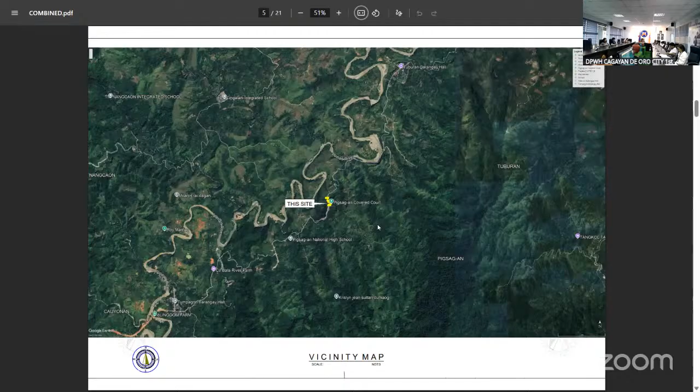There's also installation of solar street lights. For the general drawing, it is located in Barangay Pigsag-an. This is the vicinity map and the site development plan, fronting the Pigsag-an Barangay Hall, along with its coordinates.

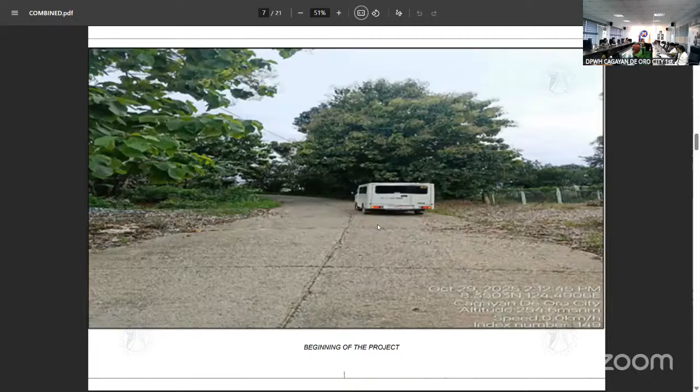This is the disposal site plan and the geotagged site images of the project - this is the beginning and this is the end of the project. For the plan and profile, you can see the scope of works, the positioning of the solar street lights, and the whole 200-meter length of the project.

This is the straight line diagram. For the typical drawing, we have 2.5 meters on both sides, so 5 meters overall width of the project, and here are the details of the typical reblocking along the whole stretch of the project.

There will be accompanying reflectorized thermoplastic pavement markings. Here are the details, the PCCP details, and the geometric design standard drawings.

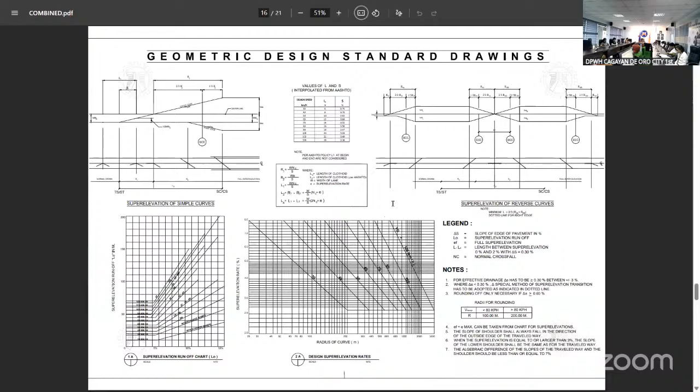For the summary of quantities: B.31 permits and clearances, 1 lump sum; B.5 project billboard and signboard, each; B.72 occupational safety and health program, 1 lump sum; B.81 traffic management, 1 month; B.9 mobilization demobilization, 1 lump sum.

1013B3 removal of actual structure obstruction, 0.23 meters thick PCCP unreinforced, 1,000 square meters; 1022 surplus common excavation, 496 cubic meters; 1031A structure excavation common soil, 4.75 cubic meters; 1047 gravel fill, 0.43 cubic meters; 2011 aggregate base course, 200 cubic meters.

3111E1 Portland cement concrete pavement unreinforced, 0.28 meters thick, 14 days, 1,000 square meters; 4041A reinforcing steel grade 40, 196.68 kilograms; 4051A2 structural concrete, 2.2 cubic meters; 4056 structural concrete painting works, 2.4 square meters.

6121 reflectorized thermoplastic pavement markings, white, 47.2 square meters; 6122 reflectorized thermoplastic pavement markings, yellow, 16.57 square meters; 6299 C1 single arm solar LED roadway lighting, 9-meter pole, 80 to 125 watts, 3 each.

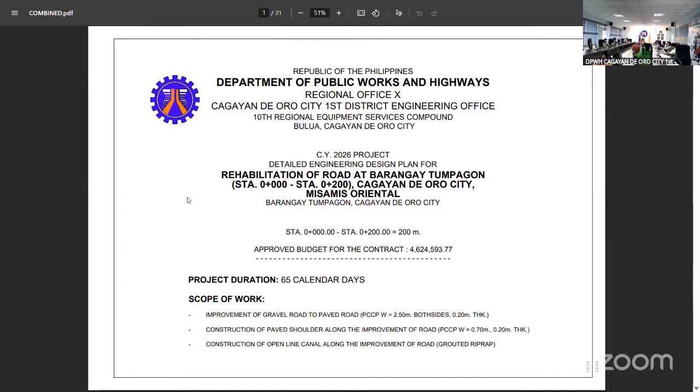So general drawing, this is located in Barangay Tumpagon. So this is the vicinity map, and this is the site development plan. For specific location, this is before the Centron sa Tumpagon, as you can see here, it is before the Tumpagon National High School. So it is left side if you're going to the Tumpagon National High School.

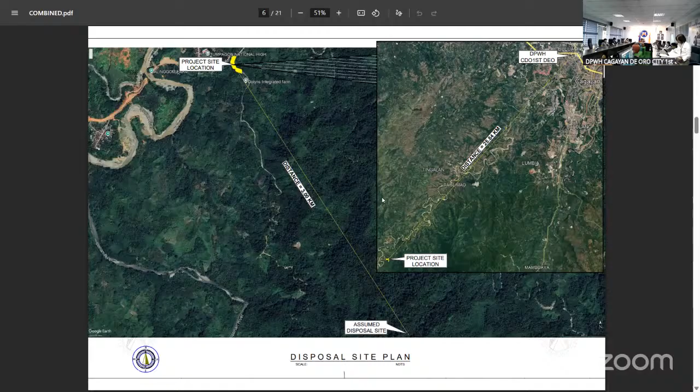So this is again the site development plan, and this is the disposal site plan. And the site images, so this is located again before the Tumpagon National High School, so going, it is located on the left side.

So for the plan profile, this is the plan and profile, indicating the scope of work along with the installation of solar street lights. So this is the straight line diagram.

So for typical drawing, this is our typical drawing. We have here the 2.5 meter both sides width of carriageway, and the shoulder of 0.7 meters both sides also paved, and the construction of line canal, material used is grouted riprap. So the whole stretch of this project is also accompanied with reflectorized thermoplastic pavement markings. So this is the detail.

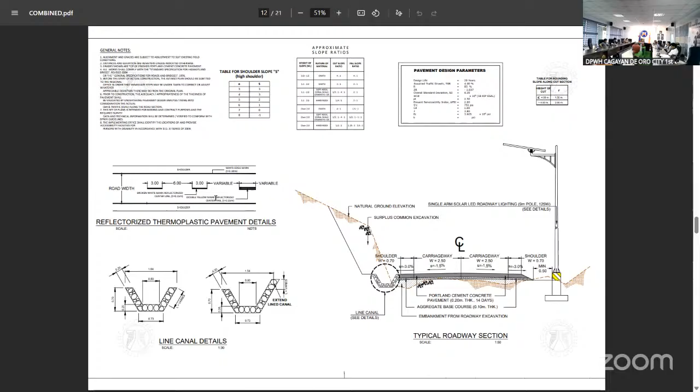So this is the PCCP details, the geometric design standard drawings.

So for our summary of quantities, we have here B.31 permits and clearances 1 lump sum, B.5 project billboard and signboard for each, B.72 occupational safety and health program 1 lump sum, B.81 traffic management 1.43 months, B.9 mobilization demobilization 1 lump sum.

1022 surplus common excavation 1,668.46 cubic meters, 1031A structure excavation common soil 7.92 cubic meters, 1041A embankment from roadway excavation 160.03 cubic meters, 1047 gravel fill 0.72 cubic meters, 2011 aggregate base course 141.16 cubic meters.

3111B1 Portland cement concrete pavement unreinforced 0.2 meters thick, 14 days, 1,280 square meters. 4041A reinforcing steel grade 40, 327.8 kilograms. 4051A2 structural concrete 3.66 cubic meters. 4056 structural concrete painting works 4 square meters. 5052A grouted riprap class A, 80 cubic meters.

6121 reflectorized thermoplastic pavement markings white, 49 square meters. 6122 reflectorized thermoplastic pavement markings yellow, 26.76 square meters. 6299 C1 single arm solar LED roadway lightings, 9 meter pole, 80 to 125 watts, 5 each.

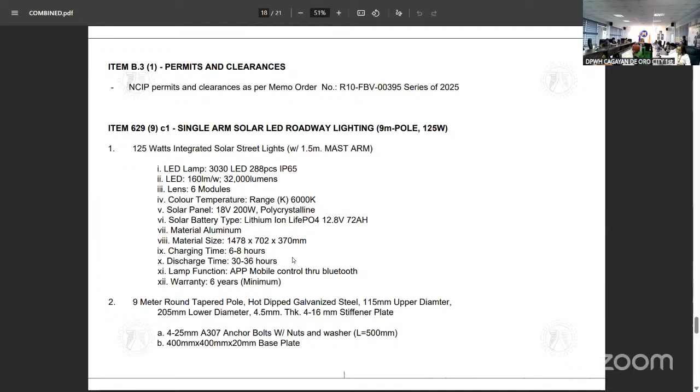In continuation, these are the attachments: the road right of way attachments and the soil test reports. So that's all for this project. Thank you, any questions?

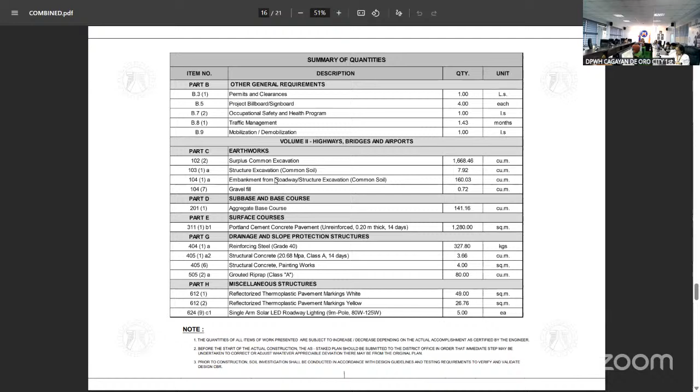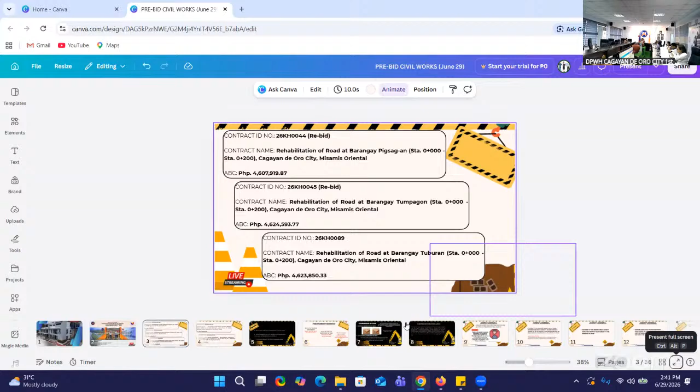Let's now proceed to the third project: rehabilitation of road at Barangay Tuburan of the city, with an approved budget for the contract of 4,623,850 pesos and 33 centavos, that will be discussed by the engineer.

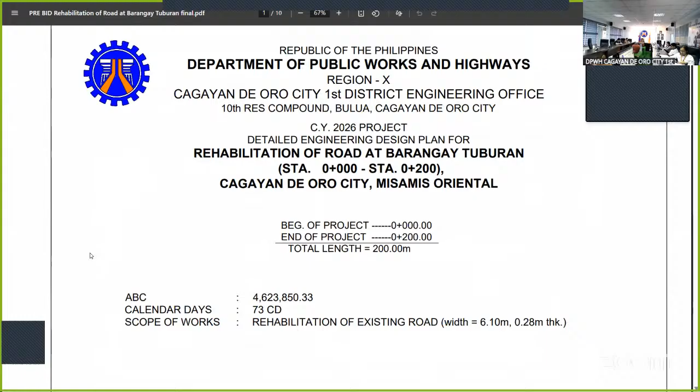Good afternoon, everyone. For rehabilitation of road at Barangay Tuburan, with station 0+00 to station 0+200, Cagayan de Oro City. With this project we have a total net length of 200 meters, with an ABC of 4,623,850.33 and 73 calendar days. This is rehabilitation of existing road to a width of 6.10 meters and a thickness of 0.28 meters thick.

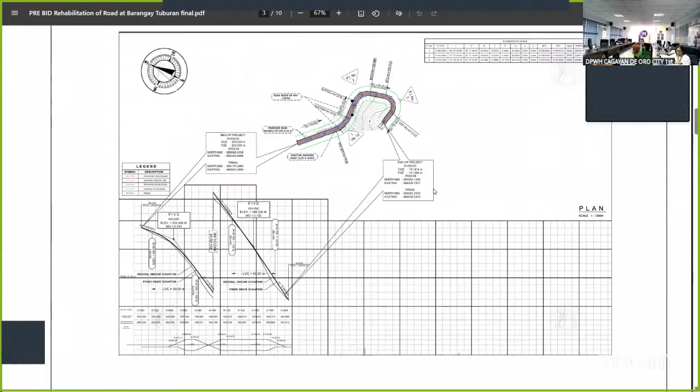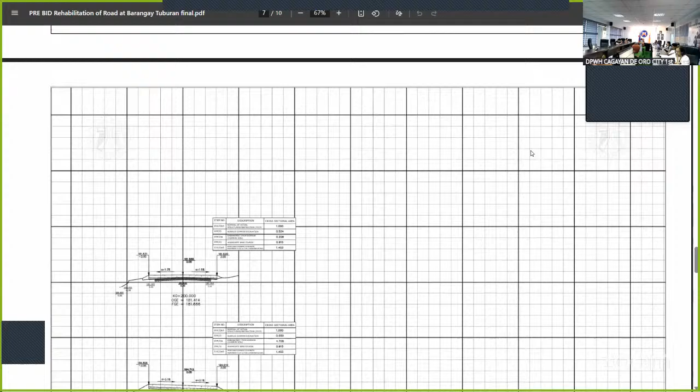Next is the summary of quantities for the project. For B.3, permits and clearances, we have 1 lump sum. B.5, project billboard/signboard, per each. B.7 (2), occupational safety and health program, 1 lump sum. B.8 (1), traffic management, 1 lump sum.

Next is B.9, mobilization/demobilization, 1 lump sum. For earthworks, we have 101-3B3 for removal of actual structures/obstruction, 0.3 meters thick PCCP unreinforced, with a quantity of 1,000 square meters. For 102.2, surplus common excavation, we have a quantity of 229.12 cubic meters. And 104.2A for embankment from borrowed common soil, with a quantity of 52.90 cubic meters.

For our sub-base and base course, we have 201 (1) for aggregate base course with a quantity of 183 cubic meters. Lastly, for surface courses, we have 311-1E1 for Portland cement concrete pavement unreinforced, 0.28 meters thick, 14 days, with a quantity of 1,220 square meters.

For minimum equipment requirements for this project, we have 2-way radio 3 owned, barricade flasher light 10 owned, trailer for equipments 1 lease, trailer for minor tools 1 lease, backhoe with pavement breaker 1 lease, payloader 1 lease, dump truck 2 lease, concrete saw 1 lease, bulldozer 1 lease, backhoe 1 lease, motorized road grader 1 lease, vibratory roller 1 lease, water truck/pump 1 lease, concrete vibrator 2 own, concrete screeder 1 own, bar bender 1 own, bar cutter 1 own, mechanized joint sealer 1 lease, and material testing apparatus 1 set own.

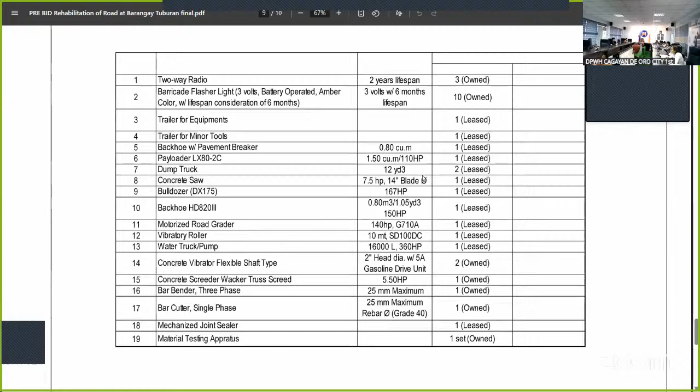If there are changes for the bid bulletin, the concrete saw will be changed to 1 own. So that's all for rehabilitation of road. Sorry, there's a next page: we have one bagger mixer 1 own, and plate compactor 1 lease. So that's all for rehabilitation of road in Barangay Tuburan.

Thank you. Any questions?

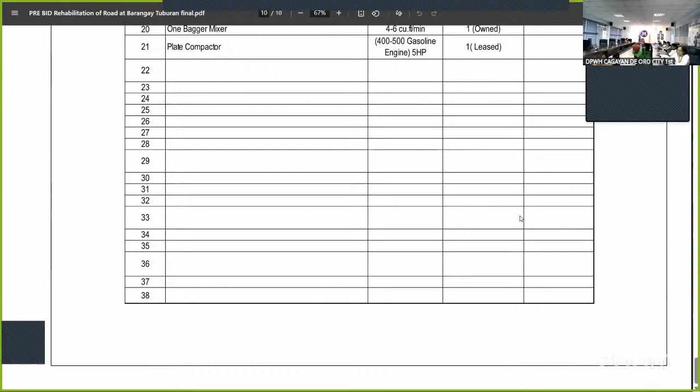Very much, we understand all of the works. There are no other questions, issues, or concerns.

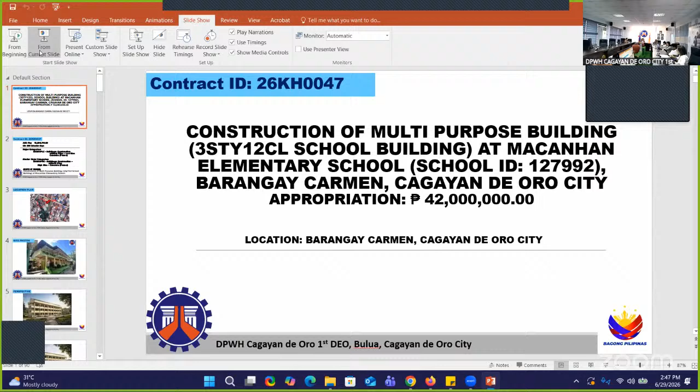Engineer Kesa Romares will be discussing the details of this project. Good afternoon, everyone.

I will be discussing project 26KH0047, construction of a multi-purpose building, 3-story, 12-classroom school building at Macanhan Elementary School, school ID 127992, Barangay Carmen, Cagayan de Oro City, with an appropriation of 42 million pesos, located at Barangay Carmen, Cagayan de Oro City. The ABC is 41,999,744 pesos and 9 centavos, with 300 calendar days. Major categories: buildings construction without piles, low-rise concrete frame.

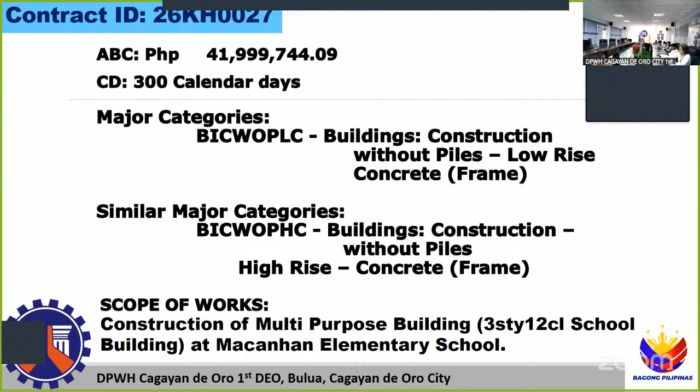Similar major category: buildings construction without piles, high-rise concrete frame. Scope of works: construction of a multi-purpose building, 3-story, 12-classroom school building at Macanhan Elementary School.

The project will be located inside the campus of Macanhan Elementary School at Barangay Macanhan, Barangay Carmen, Cagayan de Oro City. This is the location of the proposed building.

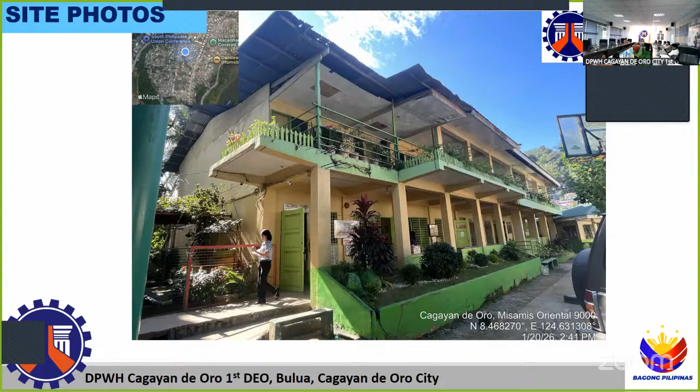The ground floor plan will consist of the feeding room, a regular classroom, and 2 classrooms combined to form a library room.

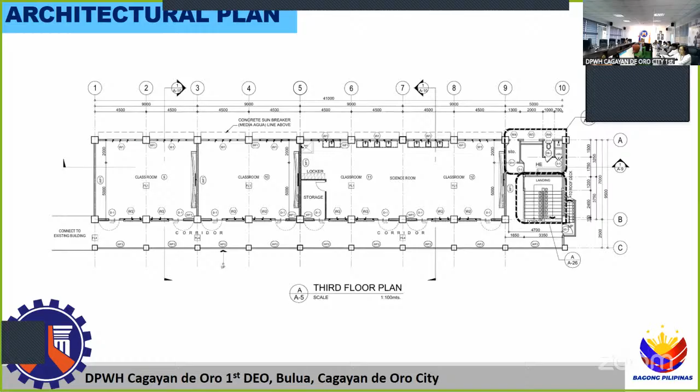On the second floor plan, 2 regular classrooms and 2 classrooms combined as an ICT room. On the third floor, 2 regular classrooms and 2 combined classrooms as a science room.

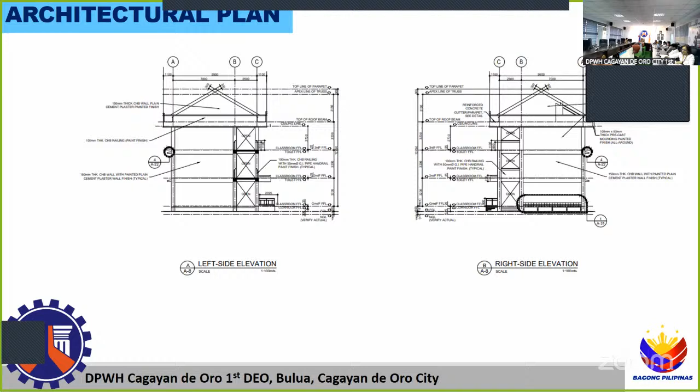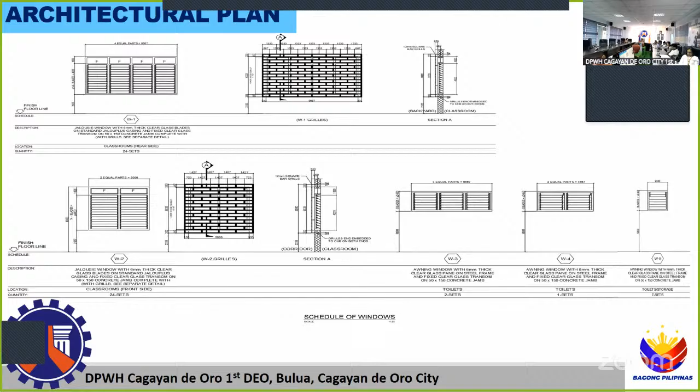The front elevation, the rear elevation, the left side and right side elevation, the detailed bay elevation, the longitudinal section, the cross section, the ground floor reflected ceiling plan, second floor reflected ceiling plan, third floor reflected ceiling plan, the roof plan, schedule of doors, schedule of windows, and detail section of the ramp for strict compliance as per BP 344.

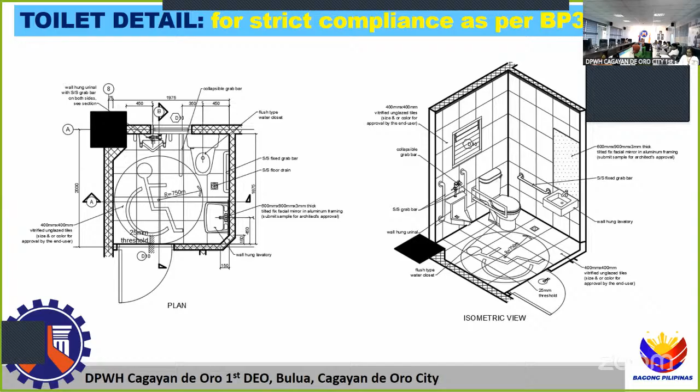The blow-up detail section of handrails, the ramp detail, the PWD toilet for strict compliance as per BP 344.

With a grab bar, the detailed plan of the male toilet at the second floor, and the detailed plan of the female toilet at the ground floor.

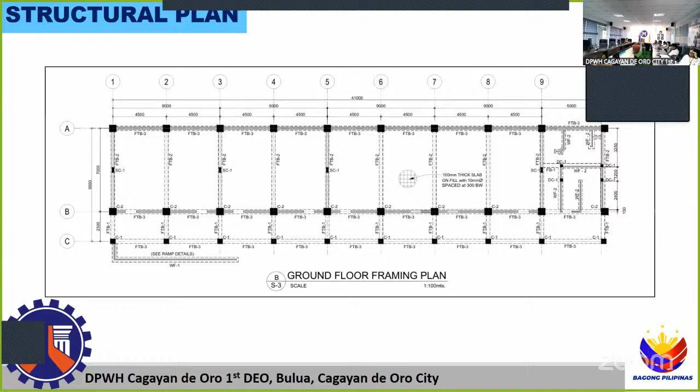The foundation plan, the ground floor framing plan, second floor framing plan, third floor framing plan, roof framing plan at bottom chord level, and the roof framing plan.

Here are the detailed plans of the elevation of combined footing 1 and the elevation of footing 1, and the details of wall on footing tie beam and the stiffener.

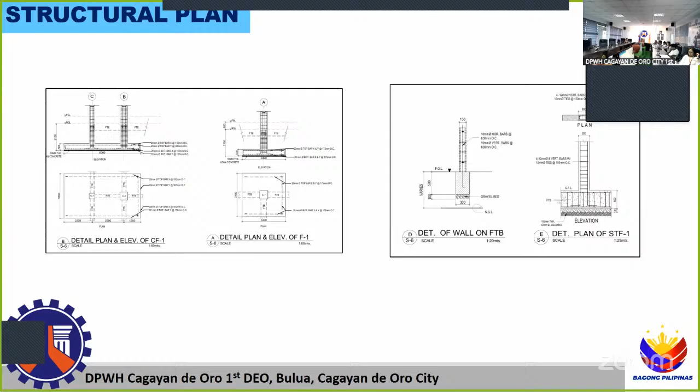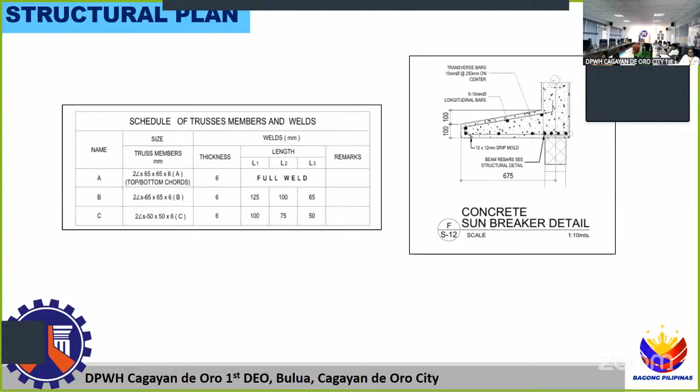The schedule of footing and footing tie beam, schedule of columns and the elevation of the column, schedule of beams, schedule of secondary beams, truss 1 elevation of end wall frame and half truss at grid 2, schedule of truss members and welds, the concrete sunbreaker detail, and the stair section detail.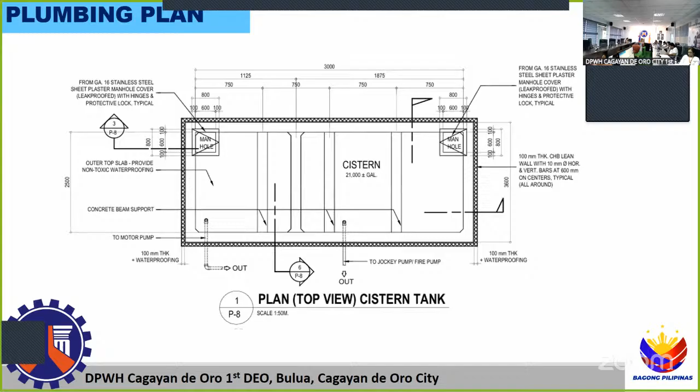The blow-up detail of the stairs, detail of septic vault, and the detail of the removable concrete cover, plan of cistern tank, longitudinal section of the cistern tank, and ground floor plan of the soil and water line layout.

Typical second and third floor soil and wastewater line layout, third floor plan soil and wastewater line layout, and the roof drain layout.

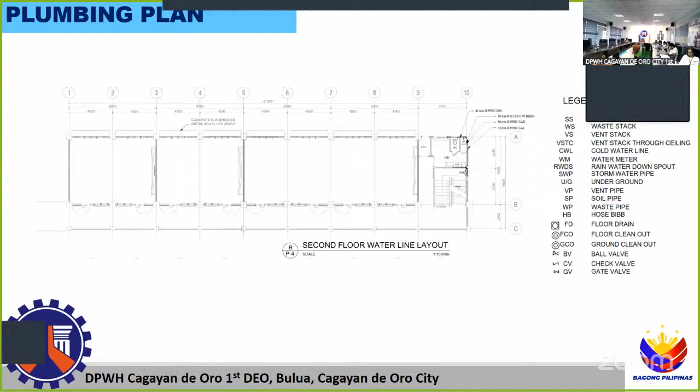The ground floor water line layout, the second floor water line layout, the third floor water line layout, and the roof deck water line layout.

Summary of quantities. Part A, facilities for the engineer, A113, construction of the field office for the engineer, 1 lump sum.

B31, permits and clearances, 1 lump sum. B51, project billboard signboard, 2 each. B71, occupational safety and health program, 1 lump sum. B91, mobilization and demobilization, 1 lump sum.

8011, removal of structures and obstruction, 1 lump sum. 8031A, structure excavation, common soil, 1,338.53 cubic meters. 803B, individual removal of trees, small b, above 300 mm, 1 each.

8041A, embankment from roadway structure excavation, common soil, 1,619.04 cubic meters. 8042A, embankment from borrow, common soil, 280.51 cubic meters. 8047, gravel fill, 97.42 cubic meters.

900-1C, structural concrete, 3,000 PSI Class A, 28 days, 553.11 cubic meters. 900-2C, structural concrete Class B, 28 days, 55.6 cubic meters.

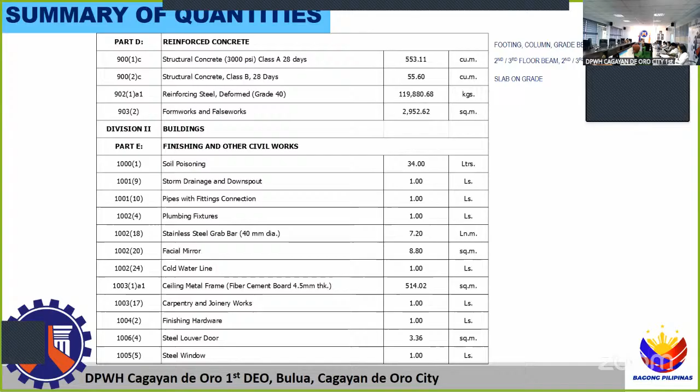1006-4, steel louver door, 3.36 square meters. 1005-5, steel window, 1 lump sum. 1009-1A, jalousie window glass, 67.76 square meters. 1012-8, glass and glazing, 43.2 square meters.

1010-2B, wooden floor, wooden door, wood panel, 45.36 square meters. 1013-2A, fabricated metal roofing accessory, ridge hip rolls, 42.2 linear meter. 1013-2B, fabricated metal accessory, flashing, 97.4 linear meters.

1014-1A2, pre-painted metal sheets, corrugated long span, 548.6 square meters. 1016-1B, waterproofing liquid, 294.08 square meters. 1016-2, built up and pre-formed membrane, 68.84 square meters.

1018-2, unglazed tiles, 34.8 square meters. 1018-5, glazed tiles, 96.4 square meters. 1027-1, cement plaster finish, 2218.86 square meters.

1032-1A, painting works, masonry concrete, 2496.06 square meters. 1032-1B, painting works, wood, 565.86 square meters. 1032-1C, painting works, steel, 793.49 square meters.

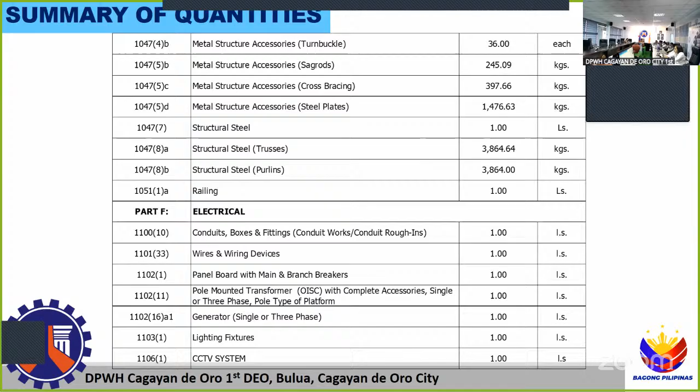11061, CCTV system, 1 lump sum. 12001, ventilating equipment, 1 lump sum. 120013A, air conditioning system, package split type, 1 lump sum.

12011, water pumping system, 1 lump sum. 12021, automatic fire sprinkler system, 1 lump sum. 12025, fire hose cabinet assembly, 3 sets.

12026B1, fire extinguisher, 12 sets. 12027, fire department connections for wet and dry type system, 1 set. 12081, fire alarm system, 1 lump sum.

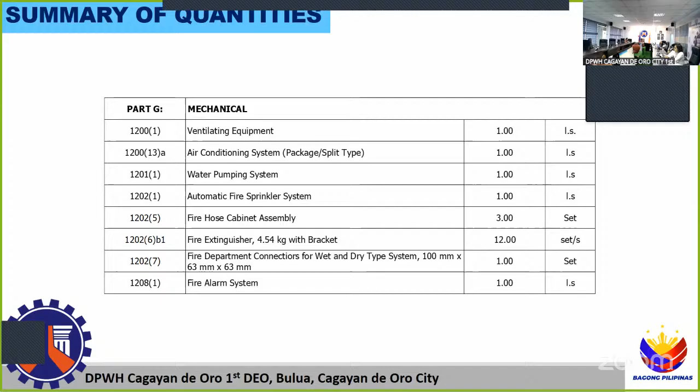So here are the summaries for the lump sum items. The facilities for the engineer: construction of field office for the engineer, including temporary classroom, installed partitions at the existing covered court at the school.

Next is the permits and clearances: building permit, all professionals, and the Bureau of Fire.

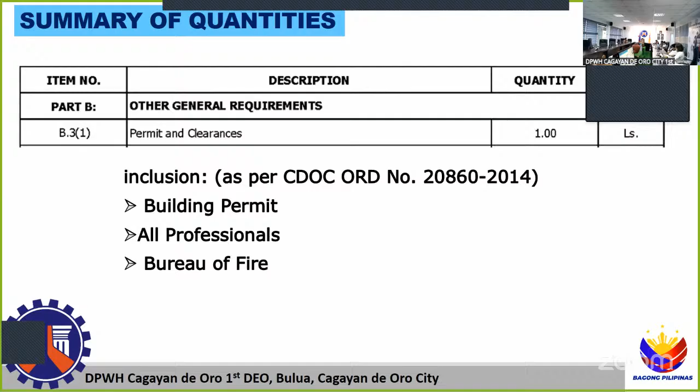The removal of obstruction: the demolition of the existing classroom building, and also the demolition of the HE room at the side, the removal of the one classroom at the back, and the removal of the existing toilets at the back.

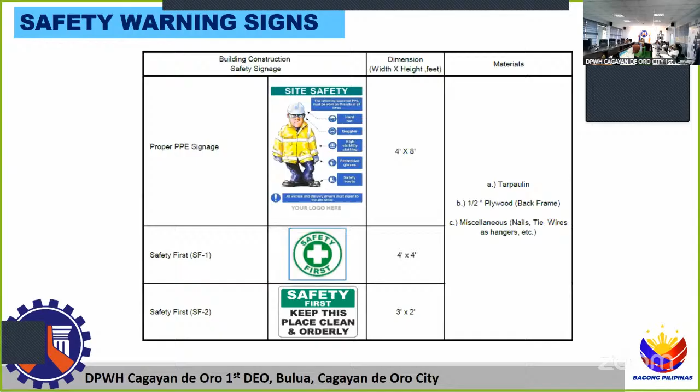Safety warning signs. Here are the safety warning signs.

For the plumbing fixtures, inclusions will be the water closet, wall hang lavatory with complete accessories, wall hang urinal with complete accessories, stainless floor drain, bidet sprayer, hose bib, and the eye wash shower combination.

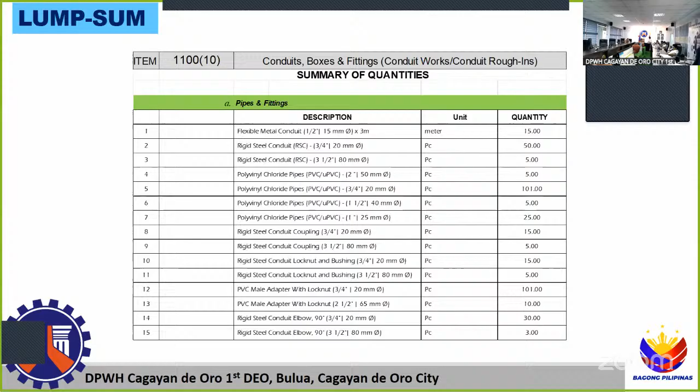The items for the conduits, boxes, and fittings. Items for wires and wiring devices. Items for panel board with main and branch breakers. Items for the pole-mounted transformer with complete accessories.

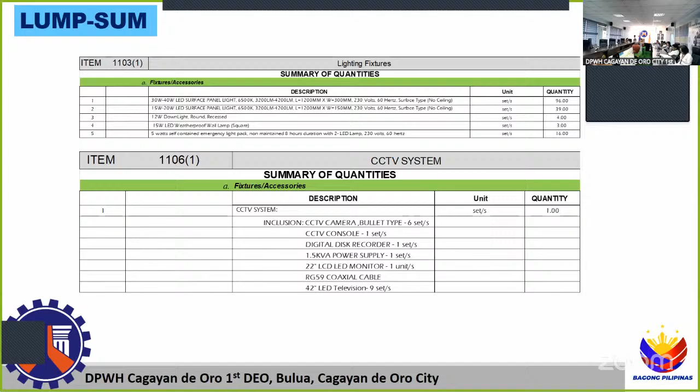Items for the lighting fixtures and the CCTV system. Items for the ventilating equipment, air conditioning system, and the water pumping system. Items for the fire alarm system, fire hose cabinet assembly, and the fire extinguishers.

Minimum equipment requirement: Backhoe, 1 unit, leased. Concrete vibrator, 2 units, owned. Dump truck, all models, 1 unit, owned. 1 bagger mixer, 1 unit, owned.

Plate compactor, 1 unit, owned. Grinding machine, 1 unit, owned. Bar cutter, 1 unit, owned. Bar bender, 1 unit, owned.

Welding machine, 1 unit, owned. Truck mounted crane, 1 unit, leased. Pumpcrete, 1 unit, leased. Material testing apparatus as per DO 11 series of 2017, 1 unit, owned. And minor tools, 1 unit, owned.

That would be all for this project. Thank you.

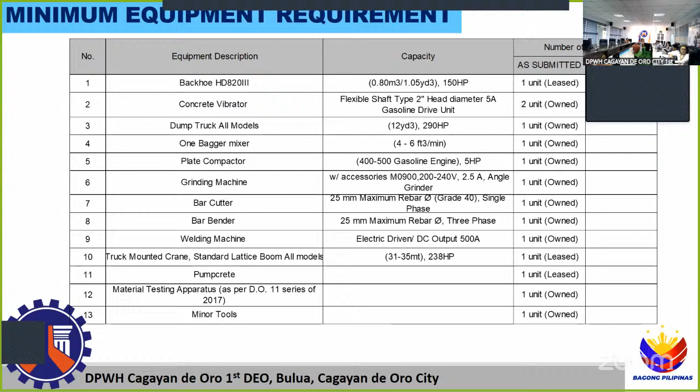There is none. Let's proceed to the last project, which we discuss, contract ID number 26880014, network development off-carriageway improvement, primary roads, Butuan City, Cagayan de Oro City, Iligan City Road. This city's approved budget for the contract is 9,443,188 pesos and 16 centavos, to be discussed by Engineer Aldrin Martin.

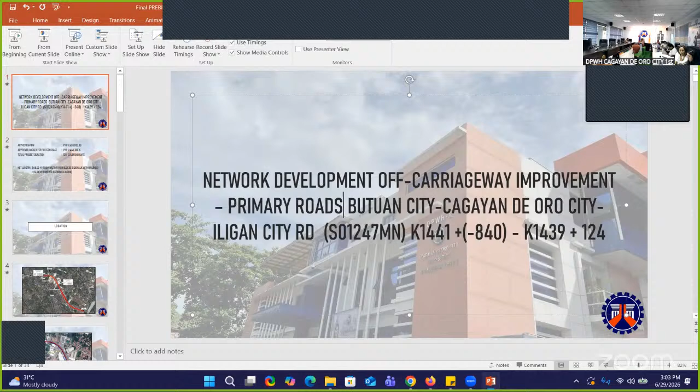Good afternoon, everyone. I will present the network development off-carriageway improvement, primary roads, Butuan City, Cagayan de Oro City, Iligan City, S01247 MN, kilometer 1441 plus minus 840 to kilometer 1439 plus 124.

With the appropriation of 9,638,000 pesos, and approved budget for the contract is 9,443,188.16 centavos, with a total project duration of 138 calendar days. For the scope of the project, we have a 548 meter, 1.5 meter width paver block sidewalk with railings, and also a 324 meter covered pathwalk along this area.

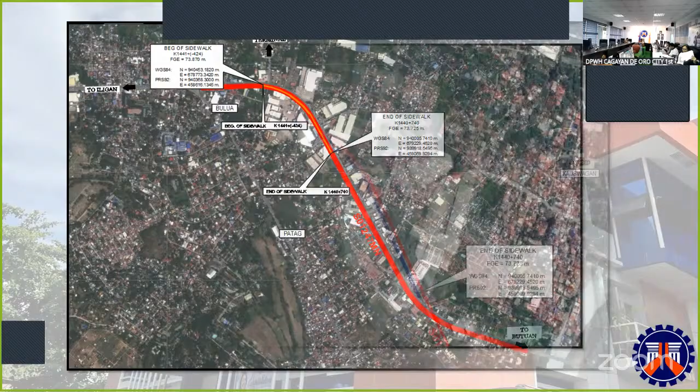For the location of the project, the indicated area is the orange one. We have the beginning and the end of our sidewalk indicated on the image. For the start of our sidewalk here at this arrow location, we have kilometer 1441 plus minus 424, in this direction.

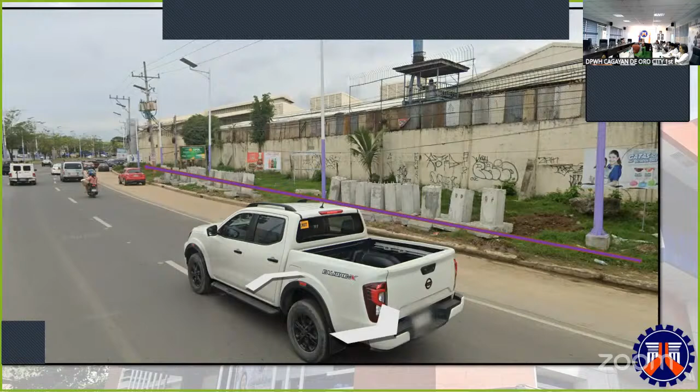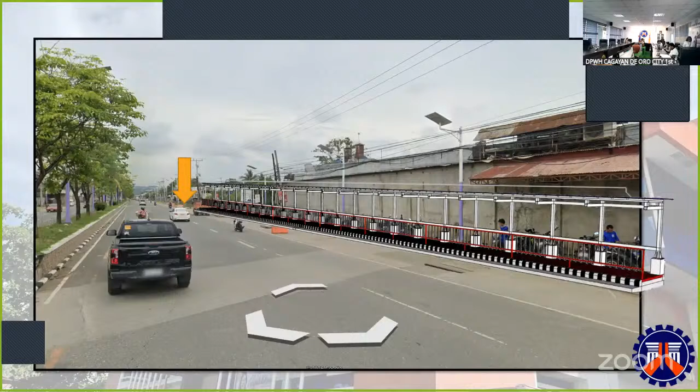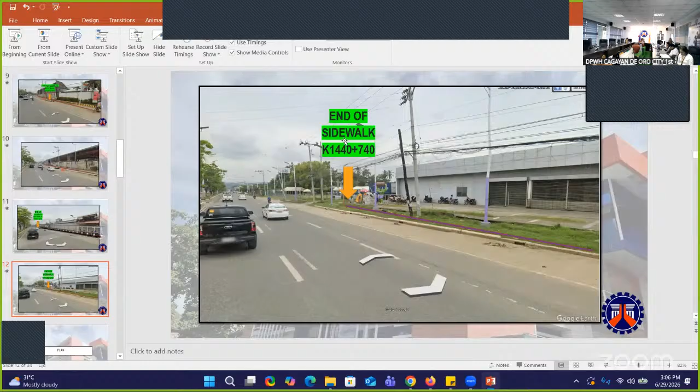So we leave gaps for the commercial areas. At kilometer post 1441 plus negative minus 180, the covered pathwalk will start along this area. Sample of how it looks like in post with the image. The end of our covered pathwalk will be on kilometer 1440 plus 840. Correction, the end of our project is here, end of sidewalk, at kilometer 1440 plus 740.

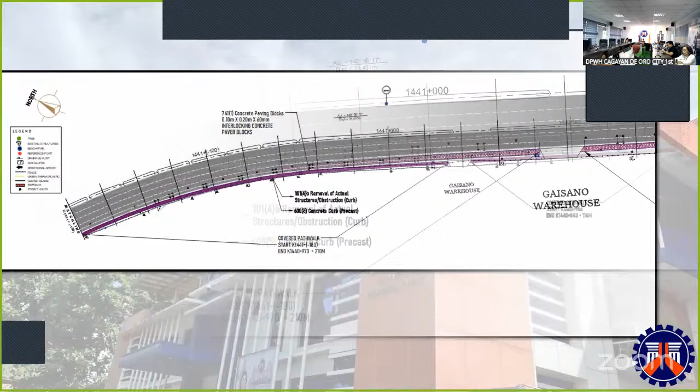The plan of our project, indicated here, the red areas are the sidewalks, and also the magenta ones are the sidewalk with the covered pathwalk. So indicated here are the stations. We have removal of actual structures from curb and also concrete curb precast.

For the typical details of our project, we have the typical roadway section with sidewalk, with a proposed sidewalk with railings with a width of 1.5 meters, and also a metal railing, grade 36 steel. We have removal of actual structure, obstruction curb, and concrete curb precast. For our sidewalk, we have concrete paving blocks, 0.10 meters by 0.2 meters by 60 mm interlocking concrete paver blocks, and below it is the item sidewalk 100 mm thick.

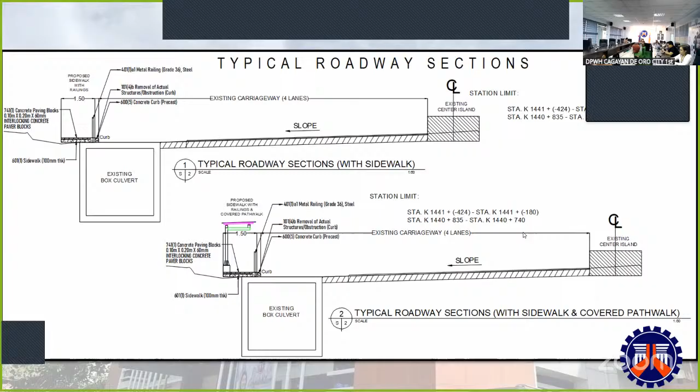For the typical section, roadway section with sidewalk and covered pathwalk, indicated here the proposed sidewalk with railings and covered pathwalk, with the station limits indicated in this plan. Also the details for the sidewalk, zoomed in, with details for our concrete sidewalk. The railing elevation plan, the connection details for the railings, and also its elevations. And also the paver block stoppers indicated in this drawing, in this isometric drawing.

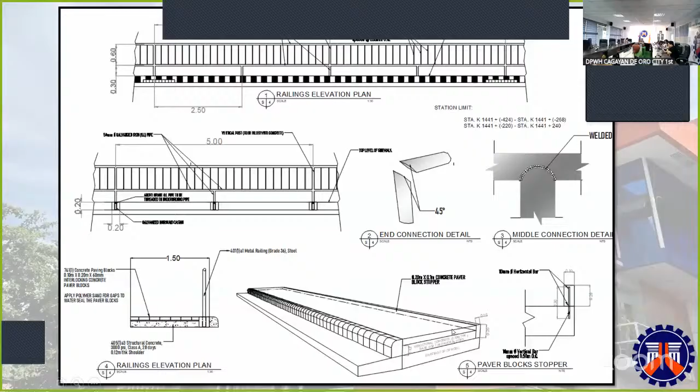We have the elevation details for our covered pathwalk. We use galvanized steel 100 mm by 100 mm by 6 mm, or 4x4 by 1/4 galvanized steel for the main framing or the post of our covered pathwalk, and also 50 by 50 by 3 mm for the beams. We have a gusset plate, and also we have a pedestal.

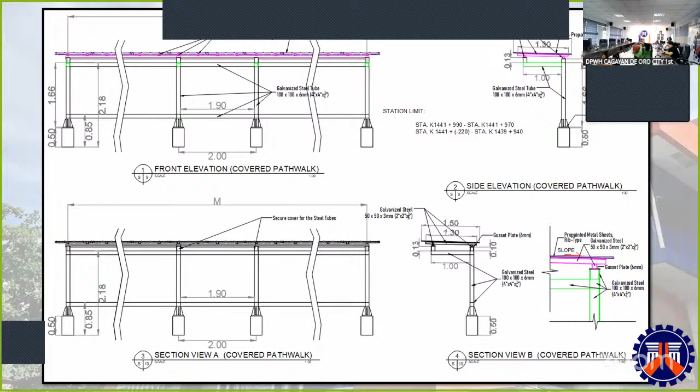For the summary of quantities, we have B.5 project billboard/signboard, four each. B.7.2 occupational safety and health program, 1 lump sum. B.8.2 traffic management, 1 lump sum. B.9 mobilization/demobilization, 1 lump sum.

For Part C, earthwork, we have 101(3) removal of actual structure obstruction, 0.1 meter thick sidewalk, with a quantity of 583.50 square meters. 101(4b) removal of actual structures obstruction curb, with a length of 548 meters. 102(2) surplus common excavation of 265.25 cubic meters. 104(2a) embankment from borrow common soil of 132.63 cubic meters. For our 401(1a)1 metal railing grade 36 steel, we have 548 meters.

403(6) structural steel painting works with a quantity of 320.98 square meters. This is for the railings.

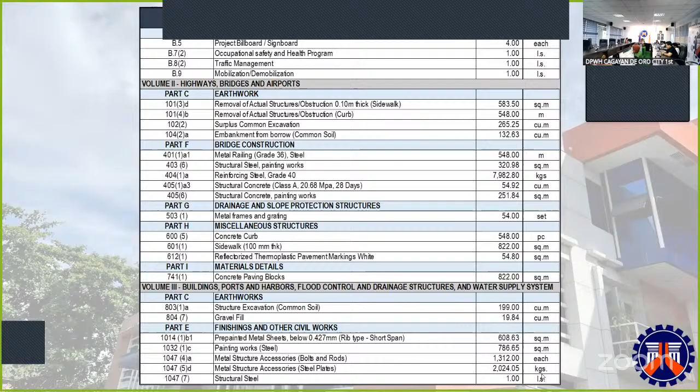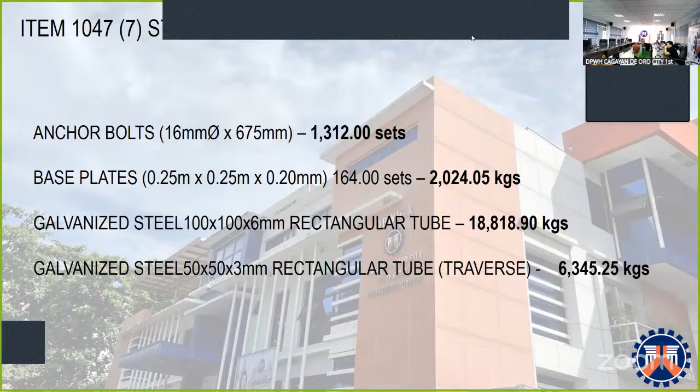For the lump sums, for our structural steel, item 1047(7), included in this item are the galvanized steel 100 by 100 by 6 mm rectangular tube with a quantity of 18,818.90 kilograms, and also galvanized steel 50 by 50 by 3 mm rectangular tube, traverse, 6,345.25 kilograms. So this is included in the structural steel for the covered pathwalk.

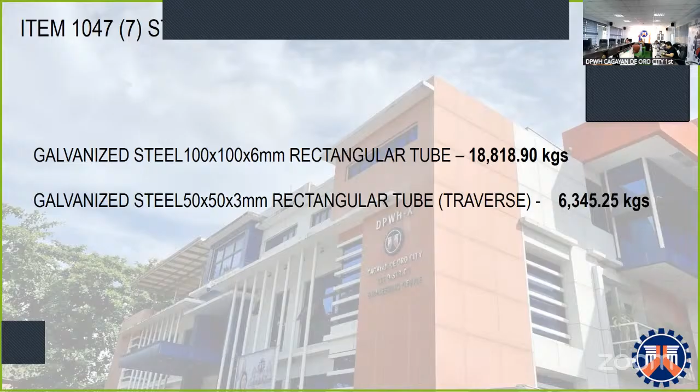And that's all for this project. Any questions?

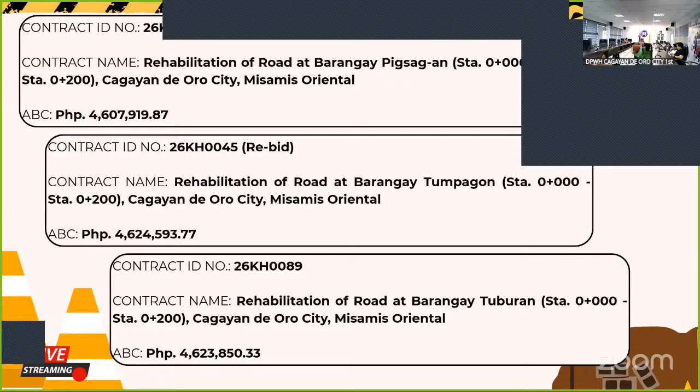So here we have the infrastructure projects with their corresponding contract IDs and the approved budget for the contract. For the agenda, we'll discuss the project details and basic contract data, next the brief orientation on the minimum requirements that must be complied with by the bidders, and lastly the common reasons for non-compliant bids.

For the procurement schedule, the buying of tender documents is until July 13, 2026 at 9:30 a.m. only. The deadline for the submission of bids will be on July 13, 2026 until 10 a.m. And the opening of bids will follow right after the deadline or the dropping of bids.

The bid submission may be done manually or electronically. However, bidders should only select one mode of submission, either manual or electronic.

For manual submission of bids, the first envelope contains the technical documents of the bidder, and the second envelope contains the financial proposal. These two envelopes are separate, sealed bid envelopes containing the original copy, copy 1, and copy 2. For electronic submission of bids, the details are stated in the bid data sheet in accordance with Department Order 87, series of 2020.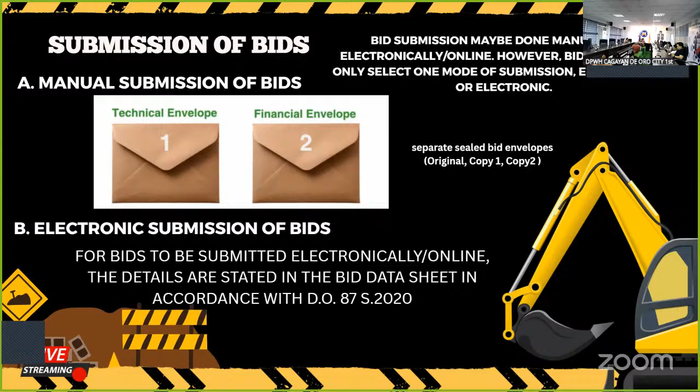Bid proposals may be submitted through an authorized representative together with the original notarized Special Power of Attorney (SPA) for sole proprietorships, or a board or partnership joint venture resolution with secretary's certificate for corporations, partnerships, joint ventures, or cooperatives, which is contract-specific, along with presentation of a company ID or any government-issued ID to ensure the representative is an official member and to prevent fraudulent actions such as unauthorized use of another contractor's eligibility for personal gain.

Under the first envelope, the bidder must provide a valid and updated PhilGEPS Registration Certificate in Platinum membership, all pages. Failure of the bidder to update the PhilGEPS certificate of registration shall result in an automatic suspension of the bidder's certificate.

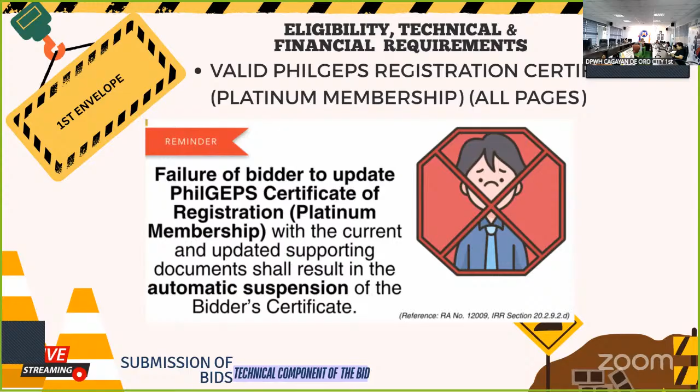Next, the bidder must provide a statement of all its ongoing government and private contracts, including contracts awarded but not yet started. Failure to disclose the required information, or providing incomplete or false details, may result in disqualification of the bidder from the bidding process.

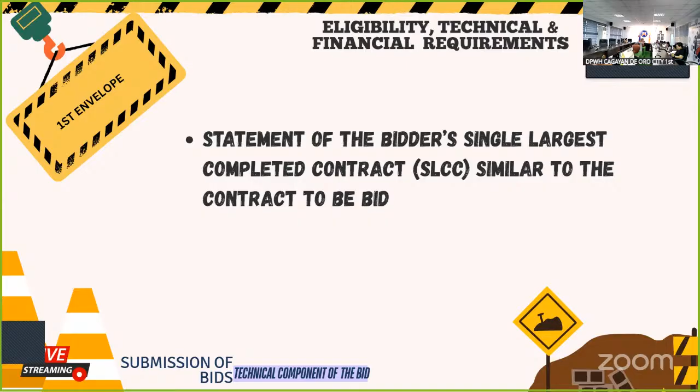Next, the bidder must provide the Single Largest Completed Contract, or SLCC. Also, the bidder must provide a Philippine Contractors Accreditation Board license, or PCAB, or a Special PCAB for joint ventures.

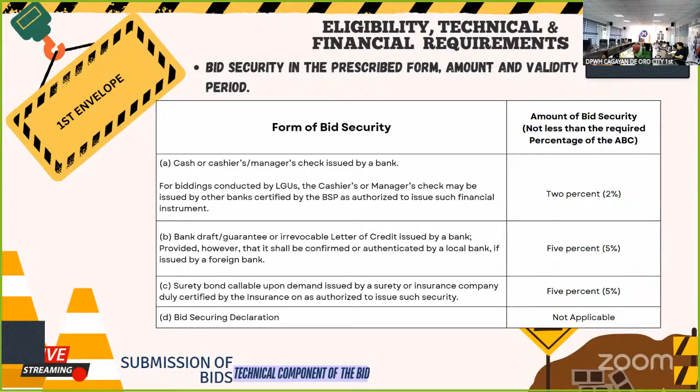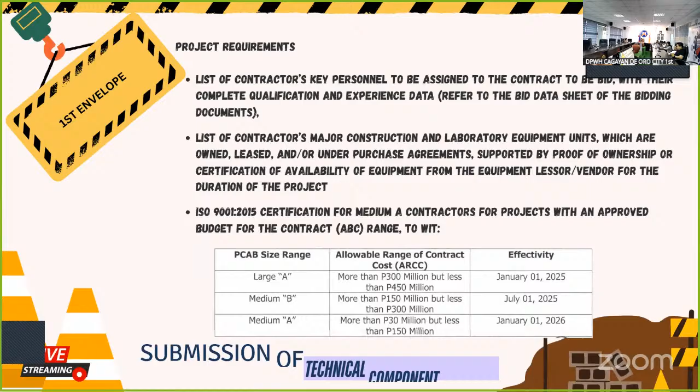Next, the bidder must provide an organizational chart for the contract, the list of key personnel, and the list of contractor's major equipment and laboratory units. Also, for contracts with an ABC of more than 30 million, there is an additional requirement, which is an ISO 9001:2015 certification for medium Class A contractors, for projects with an approved budget for the contract within the following ranges.

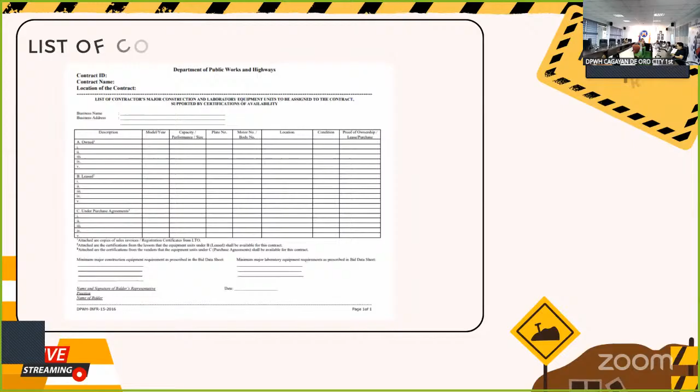Here we have the standard form for the list of contractor's key personnel, and the list of contractor's major equipment units. Please see the attached bidding documents for the required number of years for key personnel and the required number of units and capacity for major equipment.

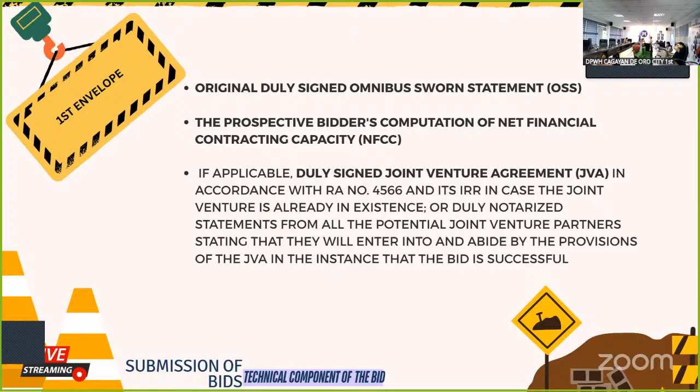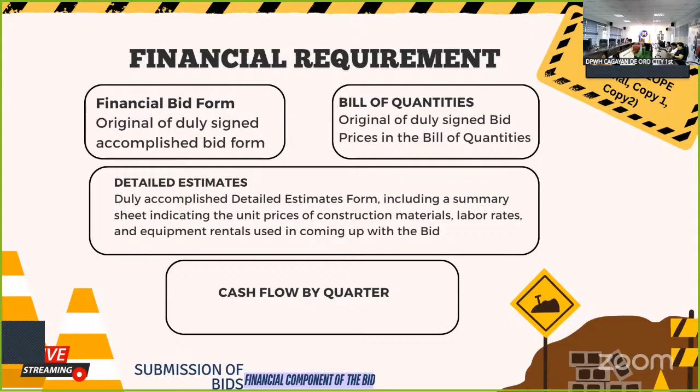For common grounds for non-compliant bids, based on observations from previous procurement activities, we have missing or incomplete required documents, unsigned or improperly signed forms, incorrect or inconsistent computations in the bill of quantities or financial proposal, expired or invalid licenses and permits, non-compliance with specified technical requirements, and failure to use prescribed forms.

To prevent this, we have preventive measures and recommendations: carefully checking the validity of documents, ensuring all forms are signed by the authorized signatory, using the exact forms provided in the bidding documents, verifying computations before submission, organizing documents according to the prescribed sequence, and asking clarification from the BAC secretariat within the allowable period.

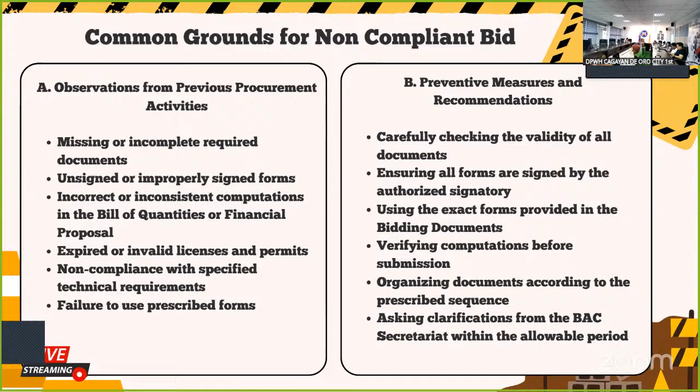So that is all, Madam Chair.